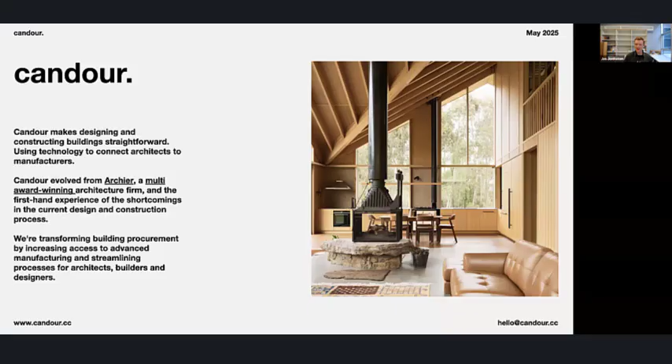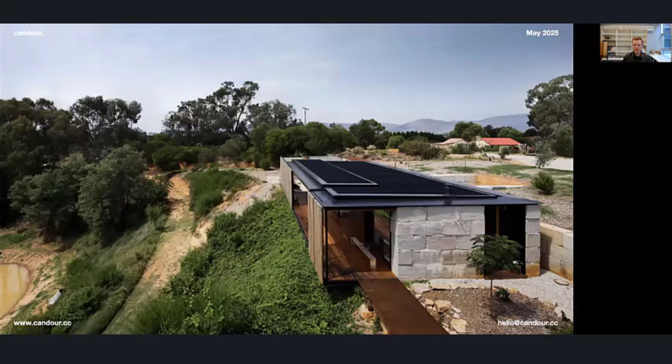So interestingly, a lot of where Candour comes from is really through the lessons that we learnt through Archier and architectural practice, starting way back with Sawmill House, which was built quite conventionally.

And even the guys from Archier were there on site with Ben, who's the brother of Chris Gilbert, building it with him. That first-hand experience really exposed the challenges and issues with conventional building.

And primarily that lesson was around coordinating different trades and the delay that often happens between those different stages, having to get one element done to be able to measure to do the next.

And then also the tolerance difference between those systems and how you kind of need to fill those gaps or reduce those to produce a high performance building.

So with Archier's focus on trying to produce those really sustainable, efficient, low cost buildings, they then moved to looking at, well, okay, what's some of the solutions that are in the market at that time? This was sort of 10, 15 years ago.

And we're one of the early adopters of using SIPS panels. This is down in Tassie and Hobart, one of the early homes in Australia to use SIPS, which is the structurally insulated panel, which you can see there on site.

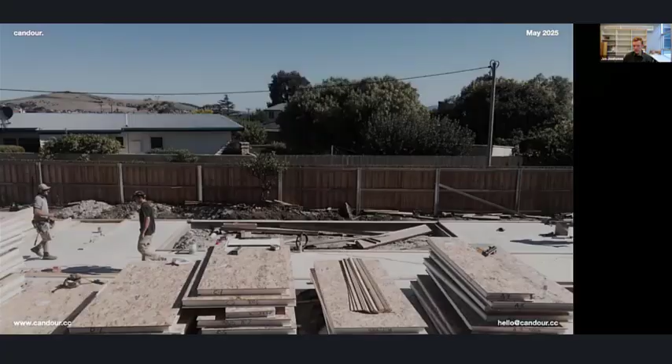But shifting to a prefab system like this, interestingly, because it's so different to the way typical builders work, and even the way design happens in Australia, it caused a lot of challenges in the sort of design and procurement process, in the sense that builders would put extra risk margin for an unknown system.

They needed a lot of hand-holding around how to actually deliver it, to the point where actually we went to site to help them and assist them and guide them.

And because it's a system that's very hard to alter on site in terms of a lot of the penetrations and those kind of things are done in the factory, and you need different tooling and those kind of things, it puts a lot more load and requirement on the designers to get it right.

And so these were all lessons that we were kind of picking up over the years around, well, if we were to develop an approach to this, a solution in this market, what would we learn, or what would we do differently? How could we make it really broadly appealing and applicable to both builders and designers?

And also, lowering the load on designers as well. So these sort of lessons, while slightly different, apply whether you're using a small scale prefab company like the SIPS ones, or through to some of the largest in Australia.

So this building is the Parks Victoria headquarters in Albert Park that was finished a couple of years ago. And this uses some CLT produced from Austria, from KLH.

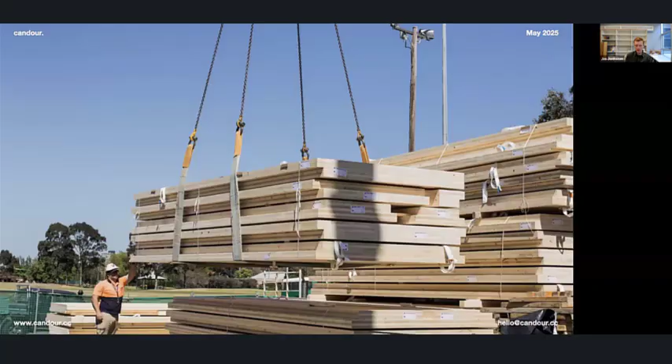And interestingly, this had its own sort of issues in the project where it was engineered and certified in Australia. Then the KLH rep looked at it and was like, well, that's not how you do it, and changed the details.

The factory over in Austria looked at it and was like, well, that's not how you do it, and changed the details without really informing the project team. Back in Australia, the builders assembled it, they worked it out, but then it failed its framing inspection because it wasn't to the documentation.

That really illustrates that separation that exists between the manufacturer and those actually designing and making the building. You're not talking to them until way too late, or there's no clear integrated process to integrate their details and information. This seemed to be repeating lessons and repeating issues, and it really came to a head in one of the final projects we were working on in Archier, the Corner House.

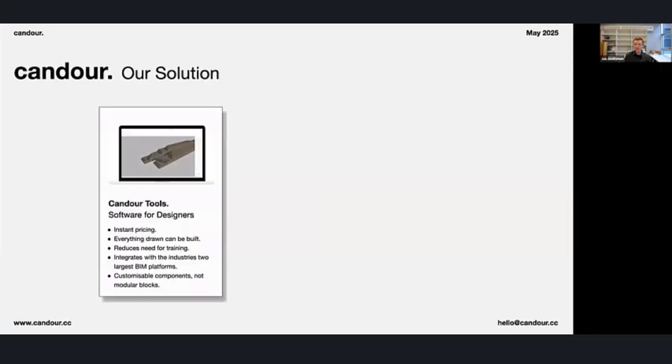This whole experience really illustrated to us that the problem that needs solving is not actually prefabrication or offsite manufacture. It's the information vacuum that exists between architects and their clients and those designing the building, and then those actually manufacturing or constructing it. We need to shift that relationship and bring that connection, that information, much earlier in the process, allowing people to make decisions with information, with agency. We often found that things like sustainability information or engineering benefits come much too late to then integrate and change the design. It really needs to be at that conceptual design phase.

So after many years of thinking, testing, and working, we refined Candour to be two core things. It's quite conceptually simple, but quite complex to deliver in many ways.

What Candour is, we're a software company that develops custom software that integrates with BIM packages, allowing designers to create custom designs with our prefab platform. That means you can create unique designs that suit your brief, budget, site, and scale. That then uses standardized connections, allowing you to get things like instant pricing, embodied carbon calculation, access detailing that's in the tools itself, with a real focus on how we can improve that procurement process, the design process, and allowing you to connect with the fabricators and manufacturers digitally, not necessarily through having a personal relationship or having a conversation.

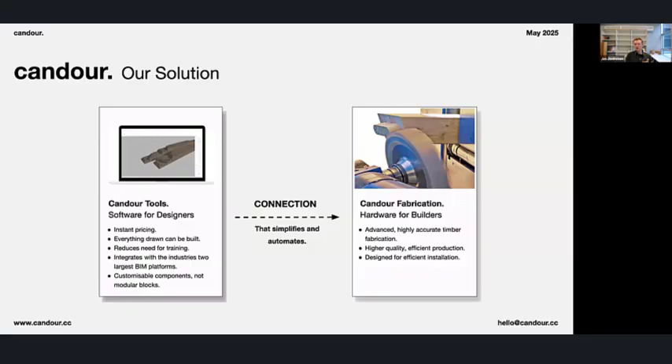We were really looking at how we can reduce the load on designers, allow them to be faster and more efficient, and reduce that learning curve to produce high performance, better quality buildings. If you just apply our platform in a standard way, it delivers that kind of quality. Because it's connecting to our fabrication facilities, that design for manufacture information is already embedded in there.

So this is a little demonstration video that I put together almost a year ago. The software has evolved a little bit since then, but it gives you a good indication of the kind of user experience you'd get from it.

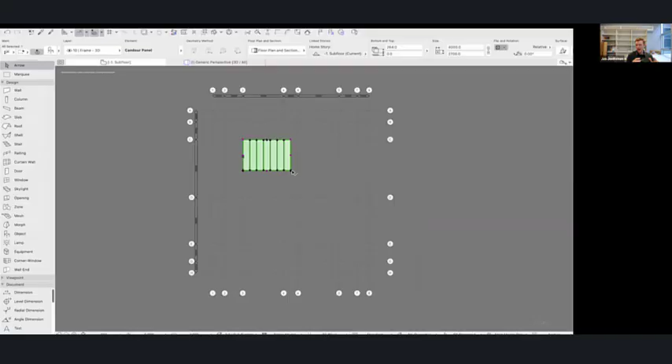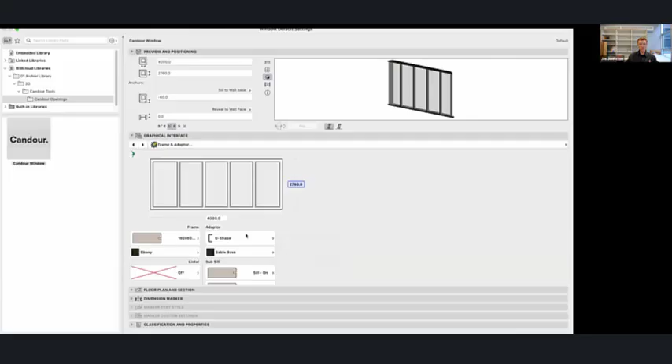Basically, we've created BIM objects or families in Revit for our building components. You can see here that it allows us to embed features, like when it turned red there, around manufacturing constraints or engineering constraints. Say the span was too far for those joists, so it's saying you need to reduce or change those. In the future, it'll be able to automatically update those based on the spans.

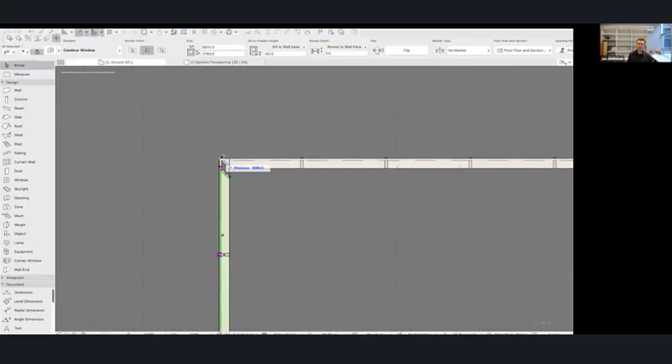It can also embed other features, like a pop-up that says, okay, you've made that piece of glass really large, above 6 square meters, so now it's an 8 mil piece of glass. It's quite expensive. Is that actually what you intended, or are you happy to go for a tighter mullion spacing and therefore a cheaper cost? A lot of the stuff you just wouldn't know as a designer unless you have that close relationship with the manufacturer, we can add all those features and benefits into the tools itself. We're providing a quick instant pricing calculation here, and you can also get an instant carbon calculation.

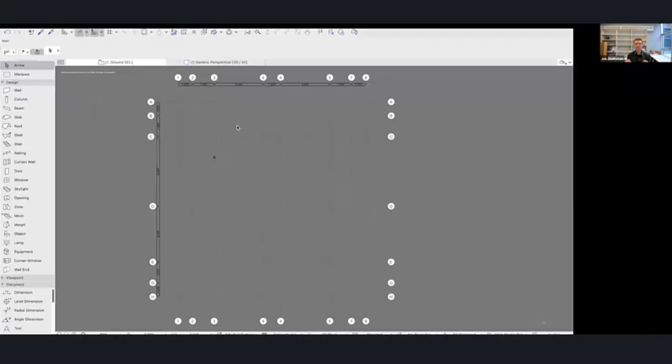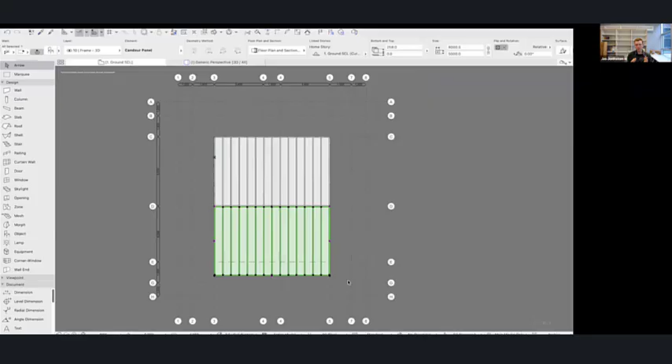That comes right at the front of your design and conceptual design process. So your clients can also have the agency to say, okay, I can see if I make this choice around what the composition of the panels is, it has this added carbon, but it increases the price. Because often that stuff comes once the design is locked in, or even once planning and other permitting and approvals are done, and you're basically not able to really change it or make those decisions around what you might actually value or prioritize.

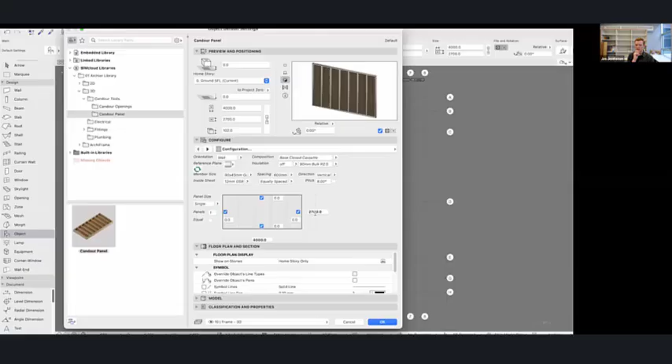So you can see here as you're stepping through, and that changes red because the spans are too long here, but we're basically mocking up a small cabin building and illustrating how you can price check as you go with our components and panelized elements. You can also add in all the different types of structural elements - walls, floors, and the glazed structural facade system that we do in there as well.

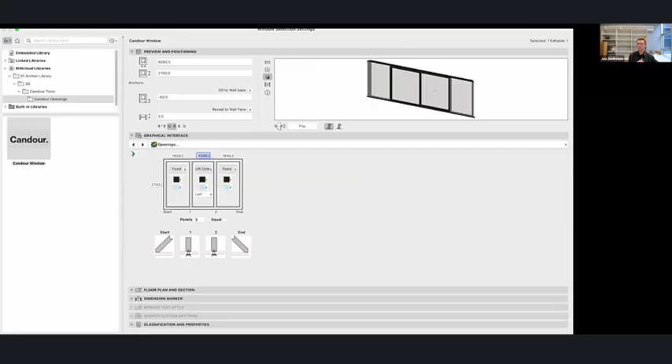And you can see here now that I'm adding in some other suppliers' components - this is actually the BINC operable doors and windows. This is a larger scale idea for this software platform: we want to have other suppliers' systems on board, so you as a designer can actually pick and choose between other modern methods of construction companies. It might be CLT or other prefabricated systems, where you can say, okay, I want to try this wall system with this floor system with the Candour facade, and actually get the best outcome for your project and your client and your site, not just having to be locked into one supplier or one system.

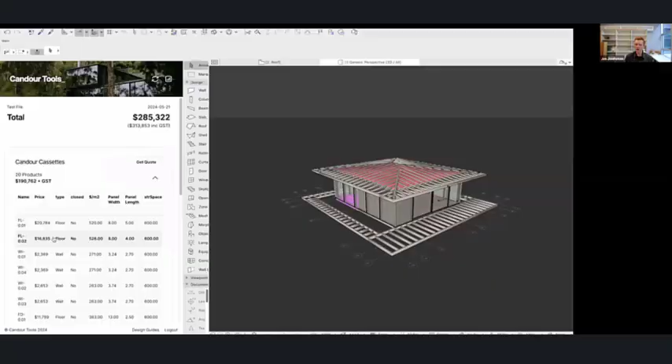We're also really excited about the kind of granularity that this can give you from a design perspective. You can really drill down quickly and say, okay, how much is my roof structure costing me, or those deck cassettes that I've just modeled in, and what happens if I change the composition of these things or what they're built up from.

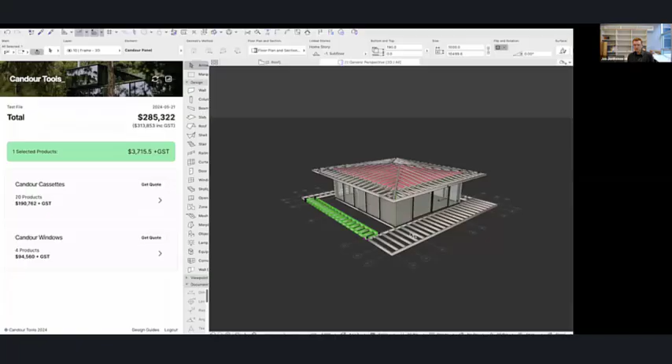And that user experience is that you can either select it in the ArchiCAD interface like we're doing now, just highlighting these components and shift selecting to say, okay, what's all the decks cost? Or you can do it in the pricing software that's there on the left, that's actually popping up natively within ArchiCAD as well. So you'll get the experience to export all of this information, but you can also log into a browser and it tracks all your different projects, all the different pricings you've done, as well as connecting it within the software itself.

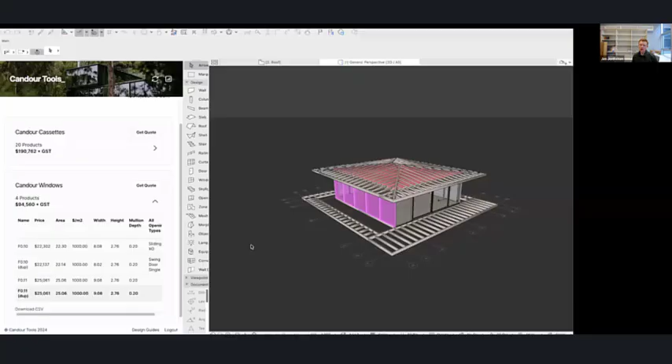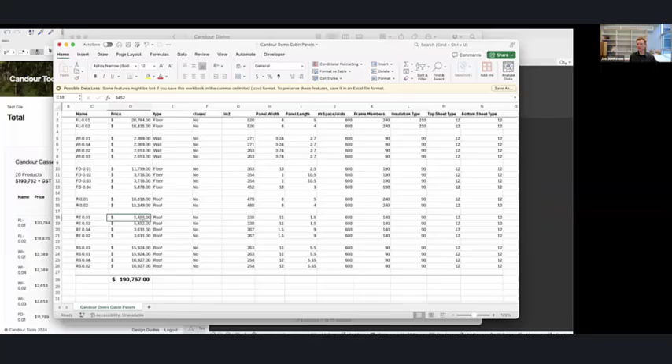So for us, this is really around how can we improve that process for people to get to a project that's on brief, on budget, that aligns with the client's desires and outcome, and allow you to move forward more quickly, and then also be able to take advantage of all these different suppliers, systems, and components more readily.

So we're currently using this within Candour. It's still a work in progress. To be honest, it's a pretty challenging process, what we've bitten off, in the sense of developing a software company and a manufacturing business, almost two different businesses in one, coming from an architecture background. So that's not our area of expertise either. We're really bootstrapping our business too, in the sense that we're self-funding it through the profits and revenue we generate. So we're really jumping from one to the other often, but we are making some really exciting progress with the software. It's just taking longer than we would have anticipated.

And we found through some case studies that we'll step you through in a second, that if you really lean into our system and our process, you can actually really compress and condense that blue section, almost halve it or even less than that. We've got one project where we did it in a quarter of the time. And just that time saving alone is a massive cost saving if you're just talking about inflation.

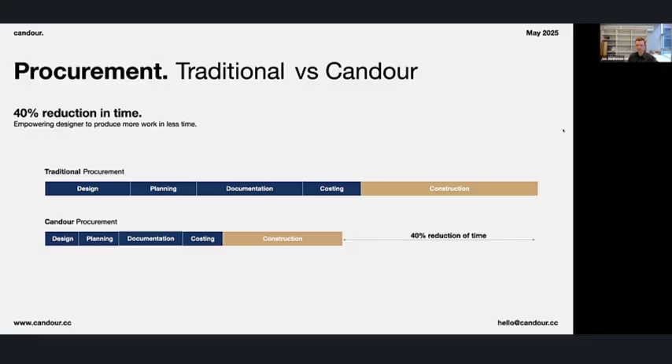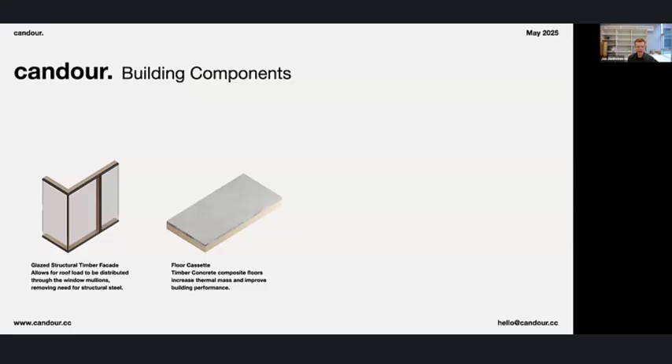The way our platform actually works is we're a panelized prefab platform. We've done this for a couple of reasons in contrast to modular, because it's much more flexible. We can use it on a wider variety of project types and sites, so we're not as constrained by access or site complexity. In a really challenging site, you can even provide the sticks, which are then assembled on site.

It's prefabricated, pre-finished, hardware's installed, but then the sticks are assembled on site, right up through to large assembled panels with glazing installed that get craned into position. We also found that modular design can be much more constraining in terms of the design outcomes, because it's often designed to fit on a truck, and the geometry and form of the buildings is really impacted by that. You're also having to include a lot of redundant structure, there for lifting and moving things rather than just being what's needed in the building.

We're really focused on material efficiency and embodied carbon around what we can build. On that note, we've really leaned into being a completely timber-focused system, a prefabricated platform. Some of the elements you notice on this slide are really the core of what we do, and we're expanding that range as well.

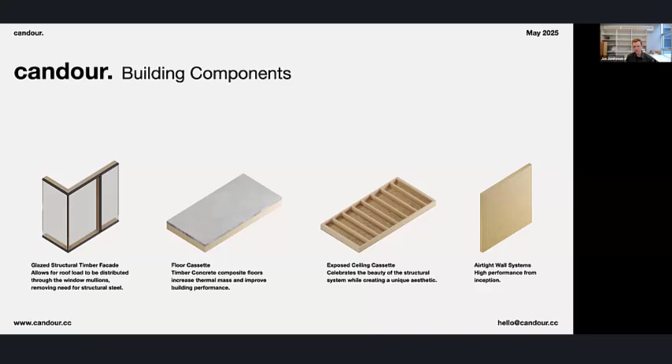You'll also note that by being componentized, we can integrate this with conventional systems too. You can still just use our facade and roof, which happens on quite a few projects, and combine it with conventional buildings like frames assembled on site or a slab on ground. You'll see an example of a project like that.

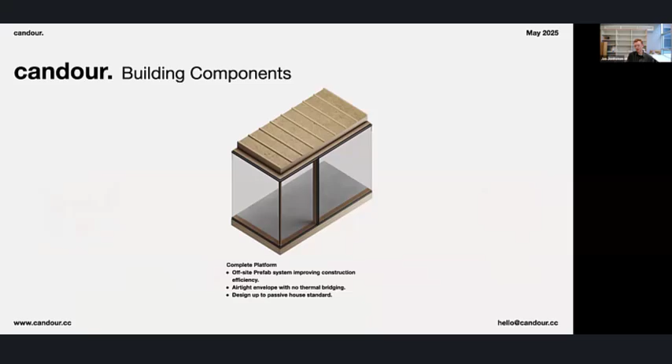But you really start to get a lot of the benefits of prefabrication when you lean into the full platform. This is an example of that, where you're doing everything basically from the stumps up—floor cassettes, walls, facade, and roof system. Everything we make is designed to be up to passive house, if that's what the project wants, but there's options to lower that specification and performance, and obviously the costs from that.

We've set up our own factory out in Tottenham, sort of near Sunshine in Melbourne. So it's about half an hour from the CBD.

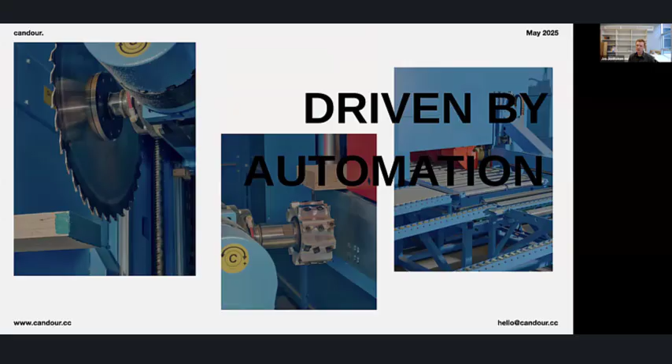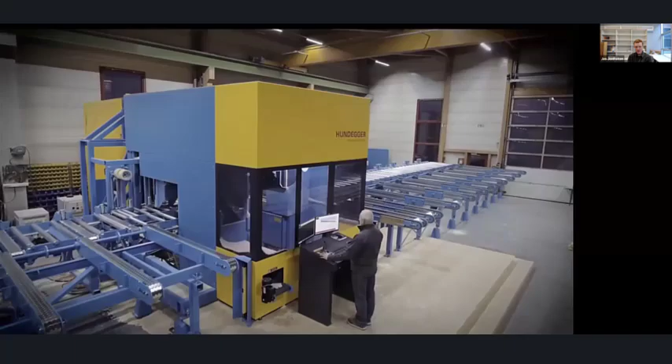One of the things we've done a little differently to other smaller scale operators is that we've really leaned into automation from the start when we set up our business. One of the big things we did, especially around timber fabrication, was we procured a Hundegger robot saw. It took about 2 years to get it, just in terms of the lead times, and obviously it's a massive investment for a small scale operator.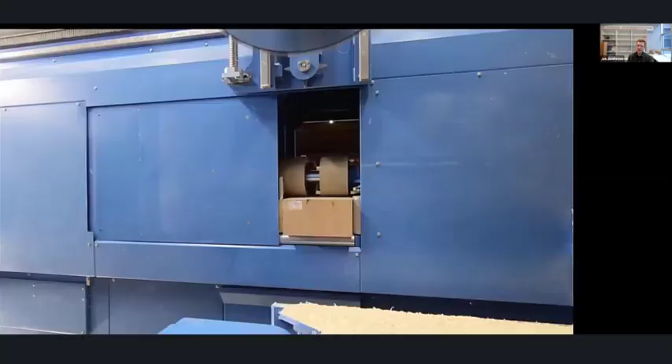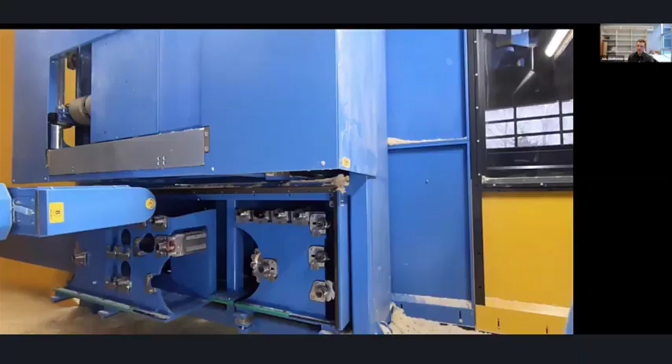But one of the reasons we did this is because it really allows us to bring back craft, that really intricate, highly accurate kind of timber joinery that's often too expensive, or our trades don't have the skill and experience to deliver anymore. You can see from this video the kind of intricate detailing these machines can do so quickly.

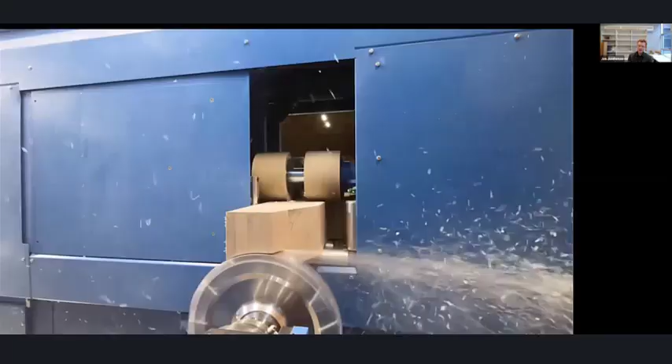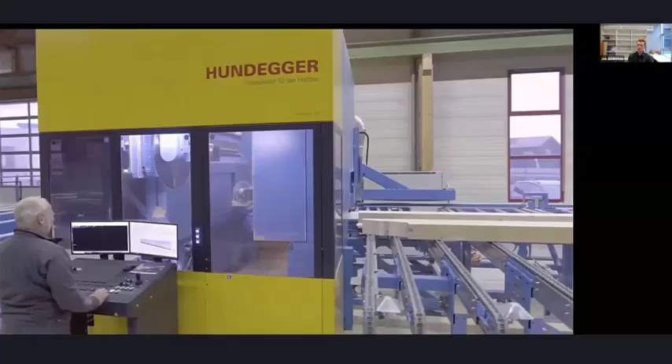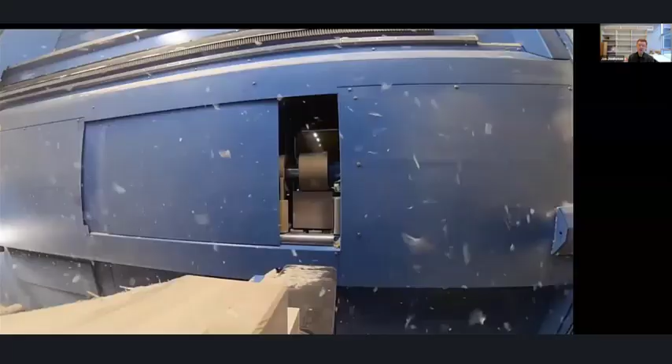The other challenge we often found trying to do this work previously is that a lot of manufacturers aren't set up to work easily with designers and their clients to detail this and help them understand what's possible. Through our digital tools, we could integrate this as standard. So you know that if you're building with us, you're getting the refinement of detailing that comes from these tools, equipment and processes.

The second important reason we wanted to go down this path is that it allows us to embed the assembly logic of each part into the part itself. You can see how all the connections and drillings are machined in. That means when you get that on our assembly tables, even for the most basic floor cassette system, like an LVL floor cassette shown here, it's mortise and tenon, pre-drilled, so you can notch them together, screw them off, and it's accurate and really fast to assemble.

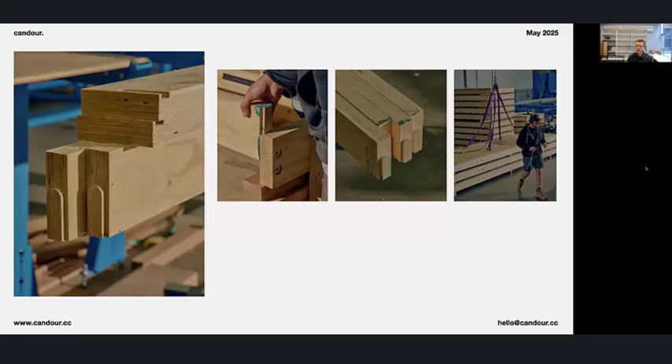It also means we can have a much more diverse and smaller workforce, because we're putting that labor, or machining that labor, into the parts themselves. So we can be a bit more nimble with how we grow our business.

So these things, and the integration of the software, the detailing, and the architectural approach to the system, culminate in some of these projects we've built. This is a bit of a case study which we documented and got a photographer to look into, so we've got a few images to run through from this one.

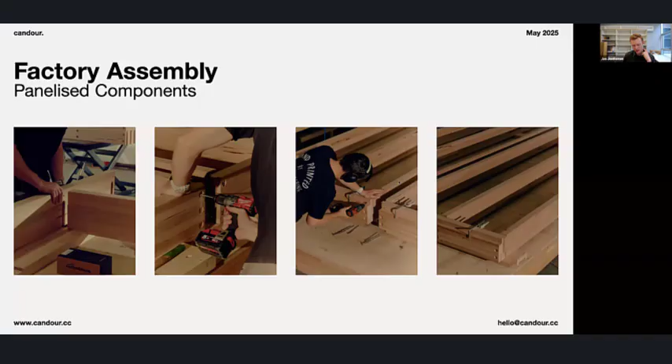The display suite was our full platform, so we basically did it from the stumps up. You can see here some photos of the assembly process for our roof cassettes. These are all glulam beams, 240 by 60, and some of the machining, the mortise and tenon detailing and pre-drilling that goes on there.

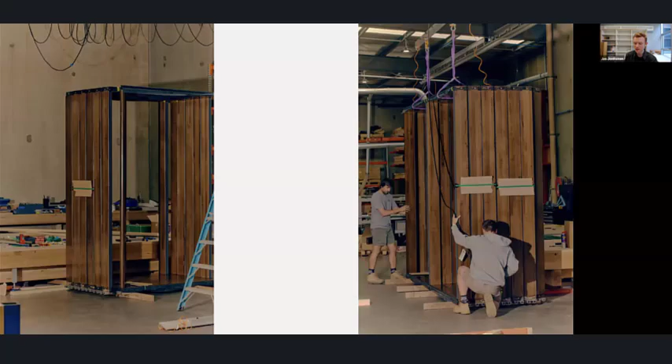Here are examples of the assembly process for our facade frames. Those are machined in factory, painted and finished, with gaskets installed and some of the hardware installed. You'll see our sub-sill system that we've designed, which Josh will step you through in a later project example. All those components are panelized and assembled in factory, then delivered to site.

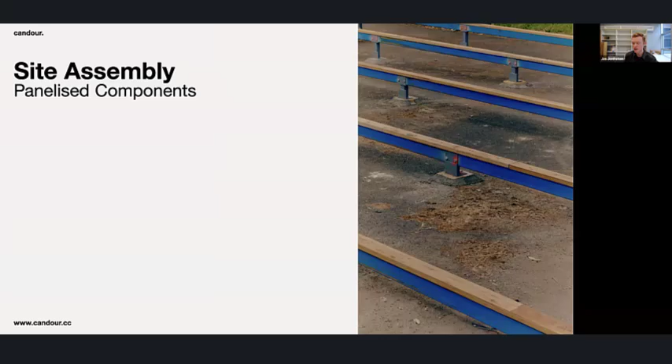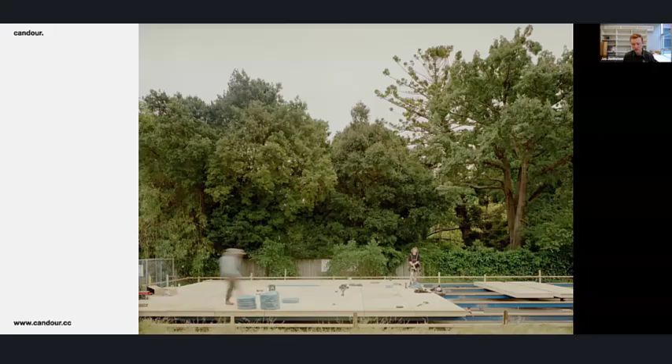The project builder is responsible for creating the foundation structure to support it, and that can vary depending on the project and the engineering. This one, because it's a temporary building, had unique stumps fixed into the asphalt of the project. The floor cassettes are then dropped onto these bearer structures with some timber blocking underneath. The simple connection is basically screwed down through the joist and the cassettes and into that blocking, connecting it to the structure below.

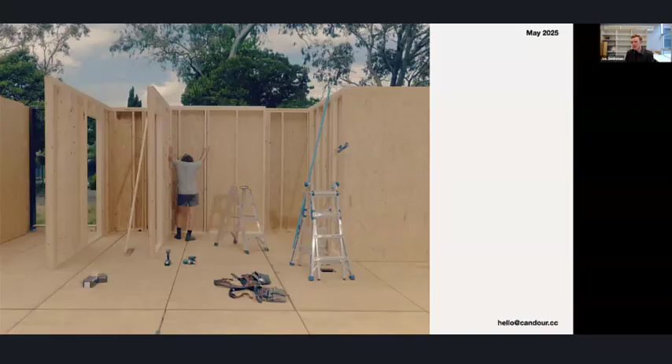You then have your wall cassettes or wall panels that come in, and you'll note here it's basically just a timber frame. We've been quite conscious about designing our system to be standard timber framing, learning from those lessons around SIPs, so that any builder can look at our system and understand it, work with it. And if things need to change on site or something's been missed, they also know how to fix it and work with it as well, although that's a rare occurrence that does happen.

But it also means, in the future, if you want to renovate or change it, there's a really easy path to do that as well. Because we set up our business to be something we want to supply around the whole country, working with local builders and consultant teams, we wanted a system that anyone could use, since 99.9% of trades in Australia work with timber framing. That was a key lesson and focus from our previous experience.

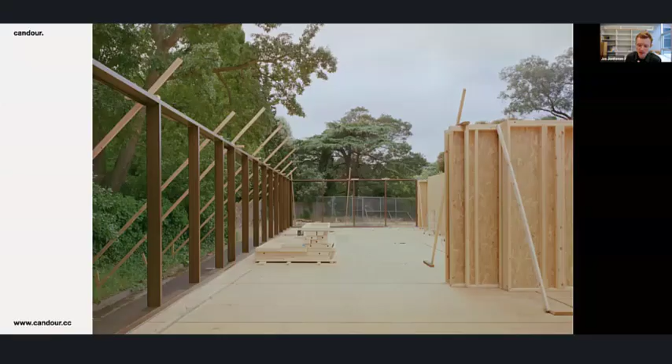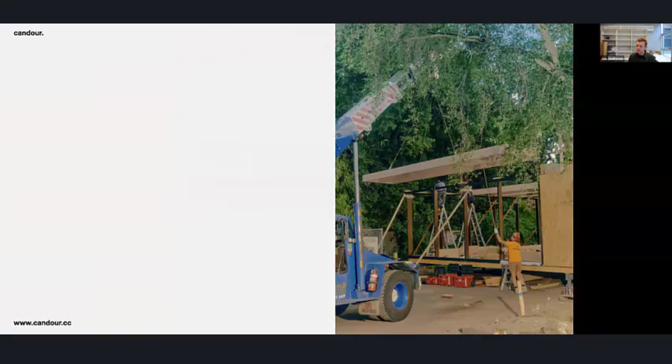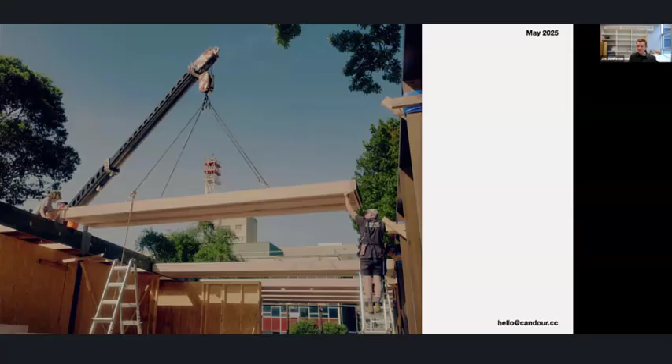We typically advise allowing about a week for each stage: the floor for a week, walls and facade for a week, roof for a week. That allows an install day of typically only a day or two, then time to fix off, make sure it's accurate and correct, with a bit of contingency. This means you're getting to lock up in sort of 4 to 5 weeks rather than the multiple months it normally takes - that's the efficiency and time-saving we're able to offer.

You'll notice on a lot of our projects we do site glazing, like here, and we've tested factory versus site glazing. This is one of those assumptions you make before doing a business like ours - that it makes sense to factory glaze and transport them as an assembled unit, lift it into place. But we found the logistics of that is so much more challenging. You can transport much less, you have to be so much more careful, so it's actually faster to just site glaze, especially for these kinds of accessible buildings.

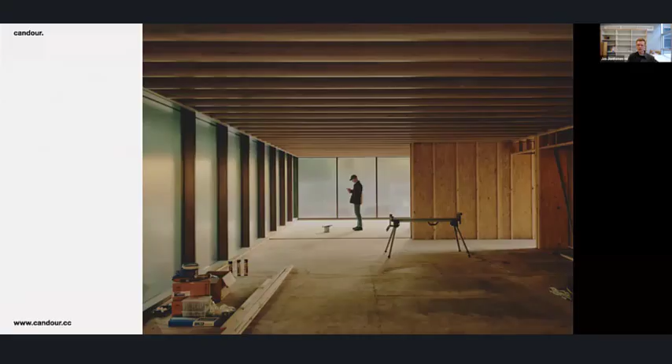So we can glaze that. This is a 300 square meter floor area building with one long facade wrapping around the edges, all glazed. That got glazed in about 4 hours, then about a day to fix off all the caps. This image shows the end of our scope for this project in terms of the structural frame and envelope, effectively at lockup.

Above this, we've also done the eave cassettes and the roof rafter system to create that fall. Then the builders come in and do the linings, finishings, and all the internal trades. This is imagery of the project once completed, once all those additions are added on. This project was designed by Woods Bagot, and they wanted to connect back to mid-century modern aesthetics around dark stained verticals - you see those mullions with that dark ebony stain, a light whitewash in the ceiling rafters, and the integration of different furnishings, kitchens, and internal finishes.

You can see the way that we can block out and provide different noggings to allow for bulkheads and other things, with the structural line running behind that in this project here.

You'll notice in a few of our projects and detailing that we have a few options around how the floor meets the head and the sill. Josh will step you through some of those examples, but this is an example where the floor basically runs into the lower side of the facade. We typically advise it be recessed down, or battening up the floor, so you get that flush finish, similar to what you've got between the ceiling cassettes and that head as well.

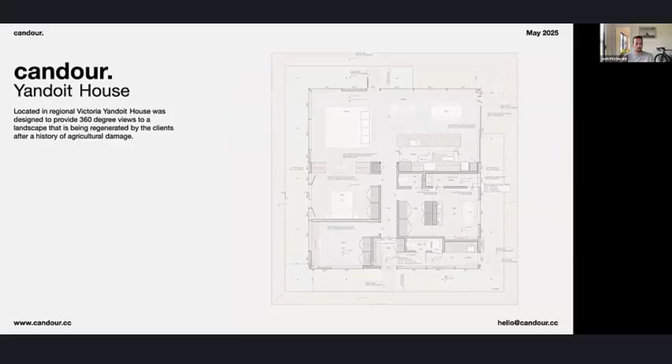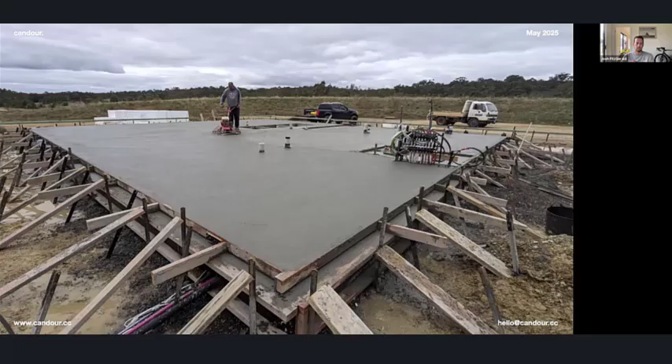Rural, designed by Arch about two or so years ago, and this one is a hybrid. As you can start to make out, it's got a slab on ground. This was previously sheep grazing, and the clients are really starting to reintegrate it to the landscape. This was not the original intent, but it came about to help with the thermal mass. Being where it's located, it gets very hot but can also get very cold, and as part of the ESD solution, just to really max it out, we went for slab on ground to get that thermal regulation.

This is a great example of how we can work in with conventional building systems as well. You're not locked into doing it one certain way or using the whole platform, but you can combine it. On this project we did the facade system, walls and ceiling cassettes, and the builder did the slab and then the roof structure and eaves.

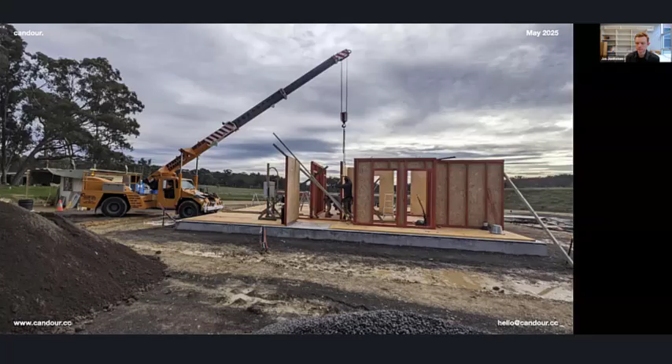A minor thing, but what you just mentioned before with milieu was part of the benefit of using traditional-ish systems is you can swap it out as well. On this project, as mentioned, it had the walls, a few of them went up first to help with the windows. We sent out in advance the sub-sill, let's say proprietary, but it's just a custom sub-sill that can get fixed off, set out, fixed off, packed and leveled, so that by the time you arrive with the frames, you're not hanging around trying to set it all out with things hanging off a crane.

This building's approximately 10 by 11, so not quite a square. And the entire envelope, if you go to the next slide, is the curtain wall system. Did you say that went up in 4 hours, Jas?

Yeah, so because of that, the sub-sill track is basically installed before you arrive, and then we provide these corresponding cleats on the underside of the facade. It allows you just to drop them in, and it naturally nests into its precise location that you can then shuffle left and right to get it to work. But it means you can get those frames up and propped incredibly quickly.

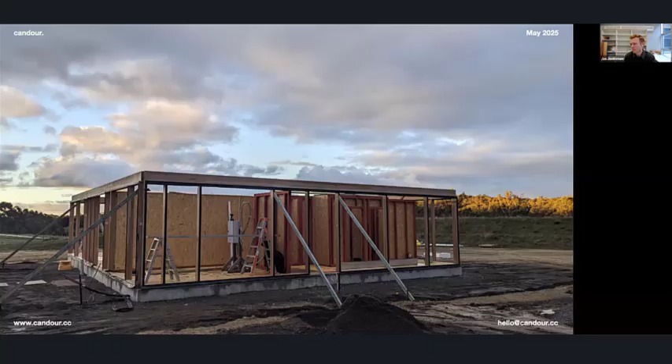Then we have all these clips that we use to connect them up, and you'll notice that lintel beam that rings around the outside is used to structurally tie it all together and link them together. This one being a square plan, it's a full ring beam, but typically that runs across the top of the facades and integrates into other elements as well.

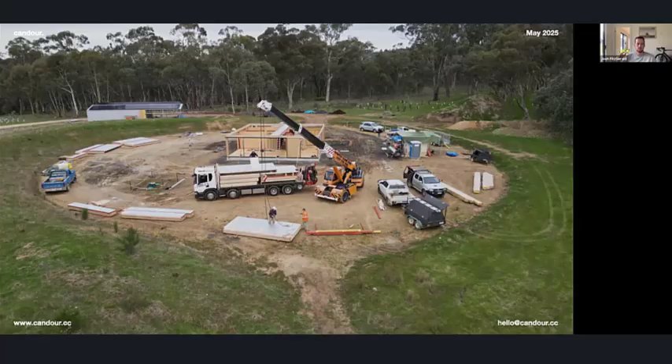So then this was also roof panels, and as you can see, this was them staging it. We'd sent out the panels, and they'd preemptively spaced them out so they could just lift them up one at a time. I wasn't there, I'm based in Hobart, Jas was there, and it took 8 hours to get the roof in.

I think you mentioned there were a few misunderstandings or something, and we probably could have got it down to more like 6 hours. Basically the builders installed that lintel slightly in the wrong position, which made it just that much more tight to get them in.

The other thing that was a bit slower than normal was Arch's design preference to have a change in direction of the rafters, so you'll notice it's going in a cruciform, which is an architectural design choice, but it made it a bit more complex in terms of install rather than just running them consistently in one direction. But the key thing is it took 8 hours with that added complexity, and we could have even reduced that further.

That connects back to the Milieu project, as I mentioned, like 300 square meters that was done in a day of installing that roof. Yeah, so that was actually pretty challenging and interesting, how do we have a structural roof panel that is changing direction, that needs to be split, and that was part of the fun of solving this project.

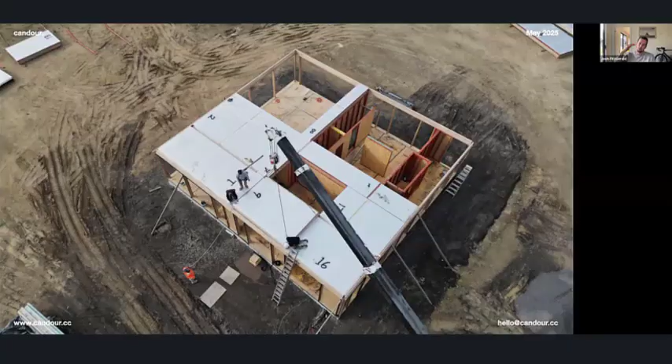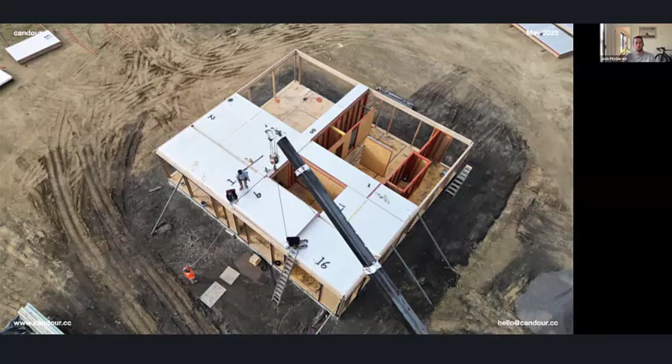In this instance, this was a 240 glulam with a plywood top, all nailed down to the bracing standard, so this forms a big diaphragm. And then we had PIR foam on top. From Arch's perspective, we were looking for a very thin roof build-up, but we still wanted that super high performance.

A minor thing here, as Jas said before, we build a lot of the construction logic into the panels. So here we have a wailing plate, which just helps you drop it down onto the facade. So you're not trying to balance it, hold it, level it. It all drops in, it can sit there as you fix it off.

I think one of the things to note here is we're quite focused on keeping our detailing and systems simple and logical. So the way this works is that wailing plate is sitting on top of the facade. The actual underside of the roof cassette is then flush with that underside of the facade, and you're basically connecting up through the facade into the lintel, and then across through the lintel into that wailing plate to fix it all together. I basically like that sort of screw connection.

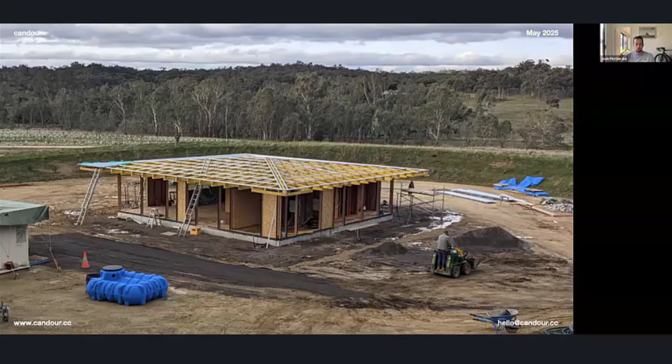So this project was a little earlier than Milieu. This is how Archer typically does their roof framing, and Candour didn't do that. But this is sort of the finished product as an overall. Maybe just to flick through a few more, Jas, because there are a few to come.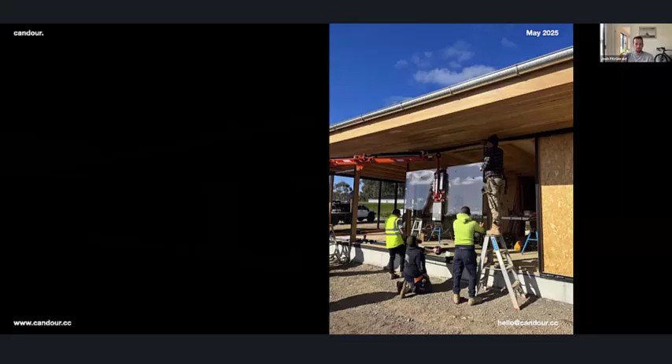Here you can see 100% facade, but we did have some infill panels, and that was a response to the engineer - unfortunately we needed to brace the building. So each facade has one, if not maybe two. But Jas mentioned this earlier, they were also just panels that we pre-sheeted, double-sided with OSB, so they were rock solid. And that one small bit of bracing was enough for that entire elevation.

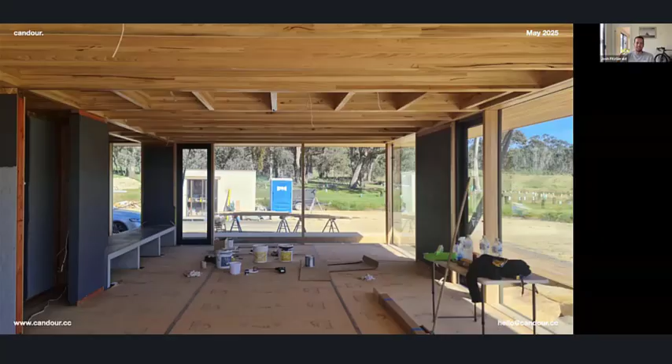And that was just pushed into the panel. You often need a place to hang a picture or something like that, so that's what those can become. You'll see a common complaint that there's too much glass and not enough place for artwork. You'll see in some of these images the kind of bolt fixing details that we can either display and detail so that they're a part of the architecture, or conceal them through plugs and other things, or even just concealed fixings completely.

Just quickly before you skip - what we can see there now is that infill panel that was then glazed over with a spandrel panel. To Jas's point before, that continuity and consistency of the detailing meant that glass just went straight up. Glass itself is surprisingly cheap, and so that was cheaper, quicker, everything, and better than a clad wall, and the processes required to do that.

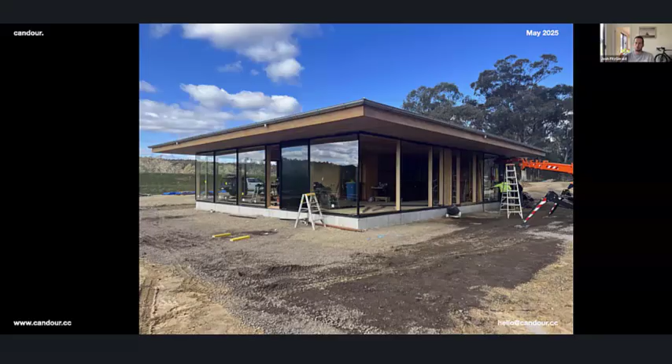And then this is the outcome, the finished product. You can see there the kind of examples of how that spandrel panel works and how you get that consistent architectural expression of that glazed wall, but you can still have internal panels. You can see hints of some of the operable doors and windows that integrate into the facade as well. You can see there that Archer chose to contrast the color, and that dark aligns with the outside finishes. It actually works really nicely because it's obviously set back in with the clear coat timber internally as well.

So basically the way our system works is you can either have fixed glazing, or there's just an opening left between the mullions where you might have your big sliders or your operable doors and windows, or a fixed wall as well. And that cladding externally, or the lining, doesn't necessarily have to be a piece of glass - it could be a sheet product, timber boards, or many others.

So you can start to see here some of the different detailing options as well in terms of how the floor meets the sill - that's that flush condition with a little bit of a quirk there. And then similar to Milieu, that flush condition at the head where the head aligns with the underside of the rafters. We find that because you get that extra volume effectively, or head height through those exposed rafters, you can create a building that feels really large or voluminous. It might be only 2.5 or 2.7 meters to the underside of that ceiling. This house in particular was only 2.5 to the underside here, but it feels much larger in that space. And then Milieu, in contrast, 2.7 plus the 240 of the rafters there as well.

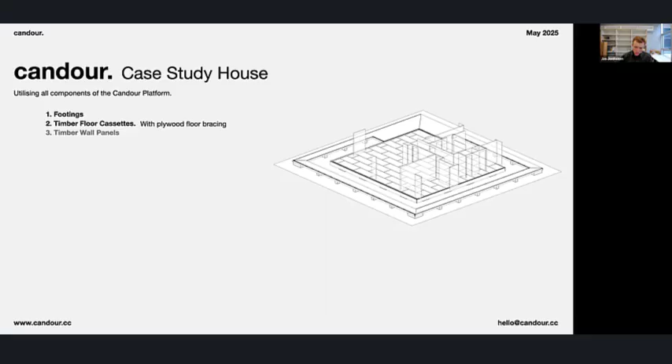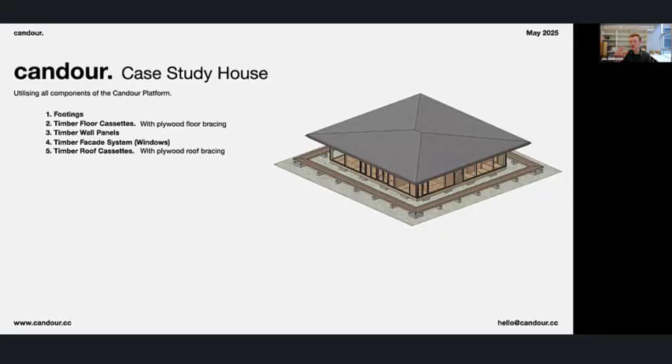In terms of cost, because that's often a first question for everyone, we've found that for about a 3-bedroom scale home, so about 200 square meters, to do the full platform shown in this diagram—including floor panels, roof, facade, walls, everything with the glazing, with the operable doors and windows, these are BINC high performance doors and windows—we're about 2,500 a square meter of supply. That's usually about a third of the total project costs.

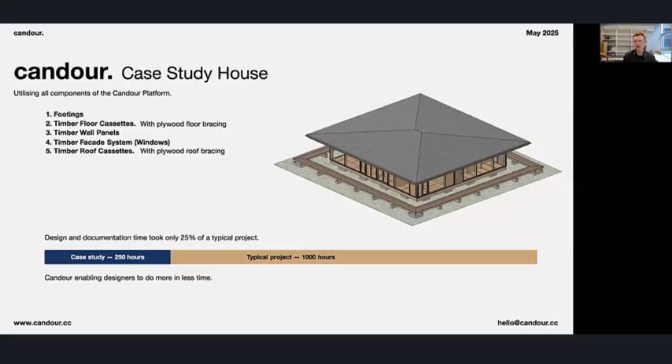This is on an accessible, reasonably located site. Obviously if it's more complex or steep, that kind of thing might increase the prices. But that works out to be a starting point of around 7,000 a square meter, which we feel is really good value for the level of product we're getting.

For that previous project in Yandoit, we did do some testing of pricing to see what it would be conventionally. We found we were sort of 30, 40, 50% cheaper to produce that same quality of building compared to conventional. So we feel like we're really good value for the quality we're providing.

We're not a low cost product, clearly, but as I mentioned at the start, as we scale and connect with other suppliers, we want to be able to provide sort of other low, mid-range options as well, and also move into other segments of the market.

So it might be commercial or into multi-res and those kind of things. Often with those ones, because you're scaling up and there's repetition, you can also have more efficiencies, which allows lowering the cost.

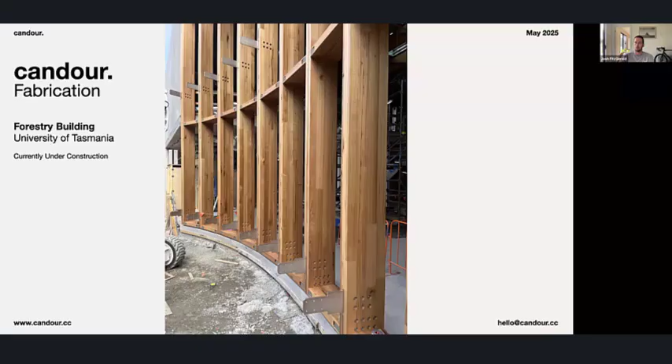Finally, there's an infill panel behind that—sorry, keep skipping to the wrong slide. I did really want to point that out because that's a beautiful way to finish what was a structural requirement. That was a lesson we learned from Yandoit, how do we make these features.

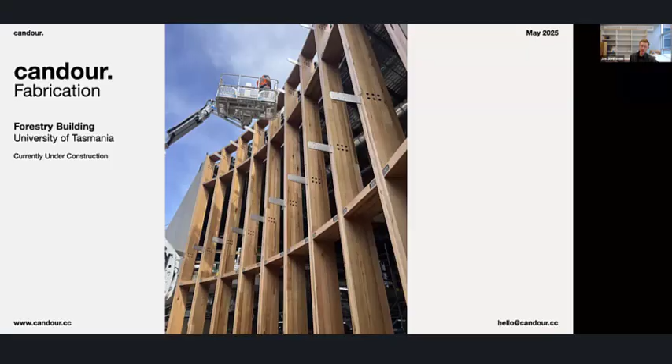This is a project we're doing for a university building in Tasmania, just to highlight that we also do custom fabrication jobs that are not designed by us, or not our system.

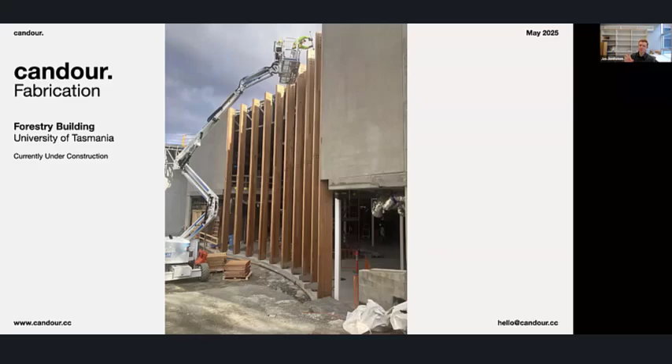This is designed by Woods Bagot, the whole building and this facade system. We've just come in as the manufacturers, providing the CNC machining and finishing for the system and all the plugs and things, and then other contractors are installing the glazing.

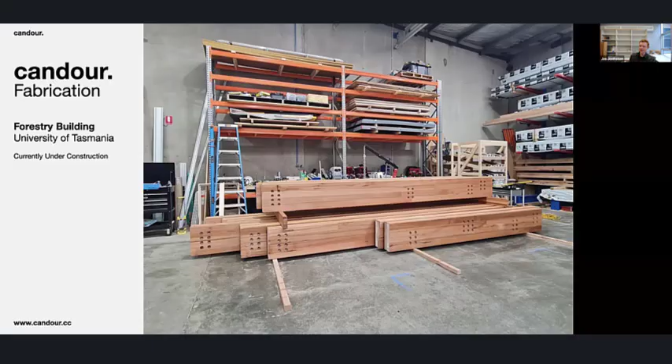So if you ever have any projects that need or would benefit from the kind of intricate detailing and design consideration that we can offer, feel free to reach out for that as well.

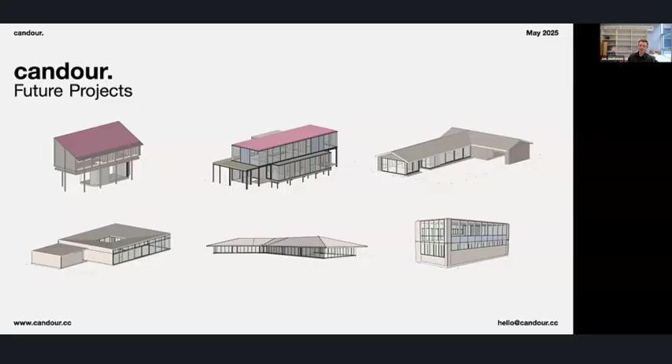But if you are keen to work with us, please feel free to reach out. Whilst we haven't released our tools as yet for everyone else to use, the process now is basically for myself to work with you to quickly model it, quickly price it for you, allowing you to get that experience of price certainty and design input from early on.

So that's us. Thanks for the opportunity, and look forward to your questions.

Fantastic presentation, and one of the most cohesive philosophies that I've seen. It's clear that you guys, along with your colleagues, have developed quite a tight philosophy and gone through this journey together.

In that sense, when you think of your story and your journey, how you got here and where you're going to go, is this a step change that came from one moment where you thought enough's enough and we have to do this differently, or is this part of a longer trend?

It's definitely part of a longer trend. I think we've all individually been a combination of interested and frustrated by the architectural and construction process, and interested in how we could better it. Our professional experience of being frustrated by how it just seems to be getting harder if you're just following the conventional processes made us think there's got to be a better way, and there's got to be ways to harness technology to improve this as well.

I think what we've tried to do is really look at what other people have done, and often what hasn't worked, and learn those lessons. Obviously we could be wrong, but we're trying to produce a process, not a product, so to speak, something we can offer to the whole industry. It's not a closed or locked system, there's lots of flexibility in it.